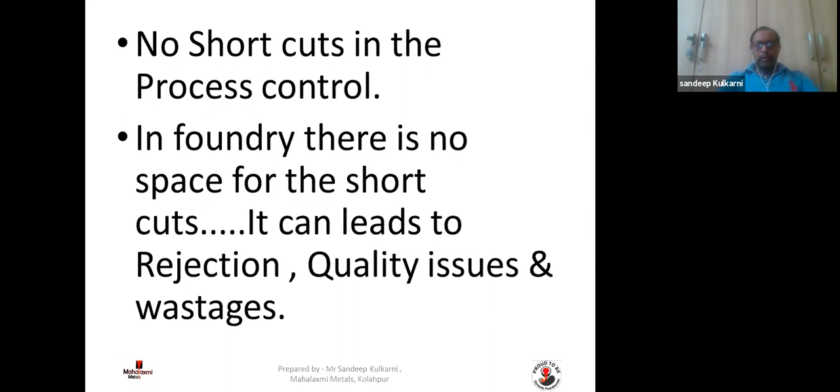No shortcuts in the process control. In Foundry, there is no space for shortcuts. It can lead to rejection, quality issues, and wastage.

We start with supervisor's role before putting pattern on the machine. It is very important that supervisors play an important role even before the pattern is put on the molding machine. The time he spends on the match plate and planning is very important and essential to reduce rejection, quality issues and wastages. First of all, he has to check the planning sheet, that is the PPC sheet, for which pattern is going to be the next planning.

It's very important what he should understand from that is critical to process parameters. The basic important process parameters needed to be controlled for that particular part need to be understood by the supervisor, and he should know which are the focus areas he has to focus on for that particular part. For example, there may be pneumatic ramming, there may be some sort of sleeve, there may be box height, there may be some chill use. So these kind of process parameters will be there which he needs to understand and follow.

He has to verify that the pattern is ready, checked by the pattern shop, and cleared for molding. That has to be ensured. Heat code, logo, and other identification information has to be verified. Down sprue or sleeve requirement has to be verified, along with core availability. Proper dressing of the core has to be ensured.

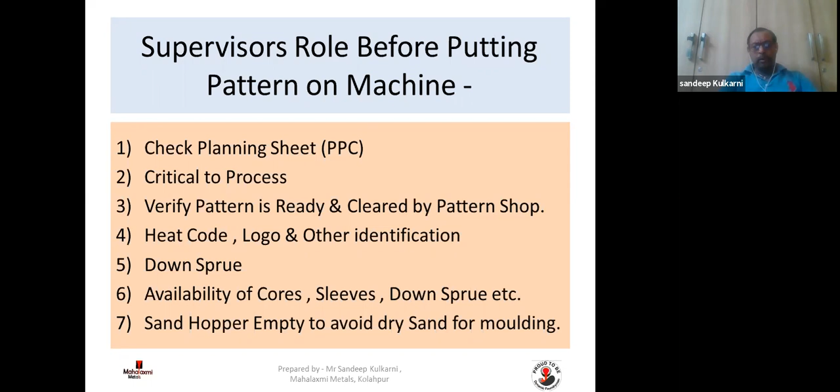We go to supervisory role, important in respect to core inspection. He has to make sure that whatever cores are coming and going to be placed in the mold are properly inspected, properly painted, properly dressed, with proper storage and proper core handling in place.

Then he has to verify mold inspection, that is, first box inspection is important. There he has to see mold hardness, vertical as well as horizontal, has to be checked. It should always be above 85.

Air pressure needs to be controlled and achieved. It should be minimum 6 to 6.5 bar. If it is less, then mold hardness will be less, the ramming will not be enough, and there will be mold swelling, which can cause dimensional issues, shrinkage, increase the weight of the casting, and many other issues due to less air pressure and less mold hardness. So he has to ensure that.

Pneumatic or hand ramming, if required, has to be ensured. Sand properties need to be verified, whether those are in given range, for example GCS, permeability, compactability, and moisture. Sand volume in the box has to be verified. We'll see some slides on that in the later stage of the presentation.

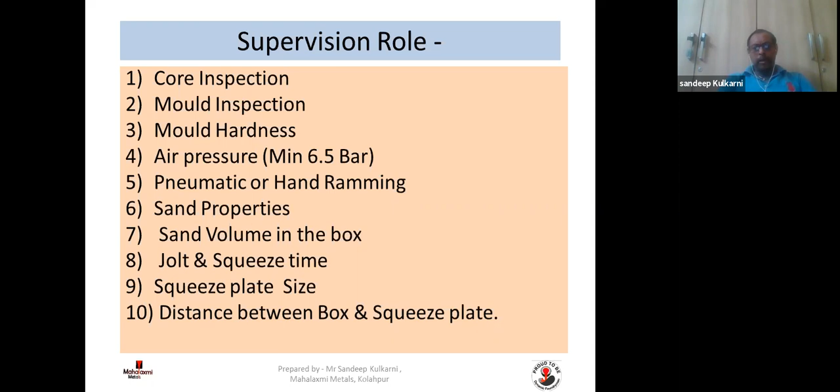Do not use graphite powder or diesel. It is very dangerous because it will hamper your surface finish. We have a specific slide on this also in the later stage of the presentation. You can use mold releasing agent instead of diesel, which will help you get not only mold release but also avoid sand sticking, and will not affect the surface finish of the casting.

Venting as per guideline: the number of vents and vent size need to be specified and verified. He has to ensure that after venting, the loose sand remaining near the vent is removed by putting in air, otherwise that sand can fall into the molding box and cause a sand defect. So not only the number of vents, but vent size and removal of loose sand is very important.

Placement of chill, denseners and chaplet as required. It is very important to see chills are properly painted. This is used after shot blasting and painting. Denseners and chaplets as specified have to be used.

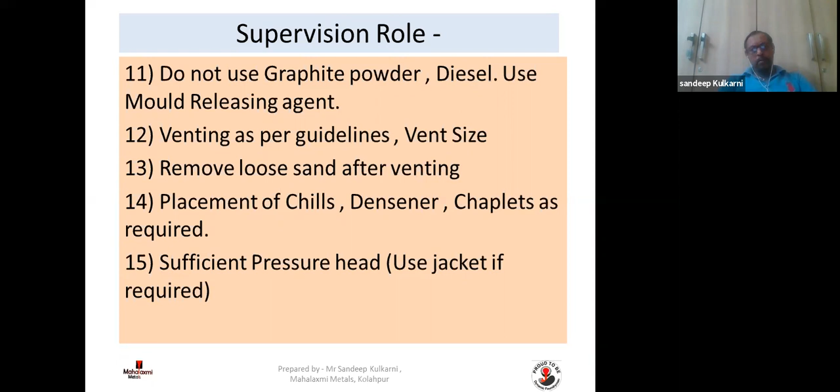Sufficient pressure needs to be maintained here. If sand height is more, more sand height is required, or a jacket is required, or box size needs to be verified for maintaining sufficient pressure for good quality casting.

Post mold inspection, as I told you earlier, is very important. He has to verify mold to mold or box to box contact. He has to verify, after closing of the box, the sand crush. He has to verify if there is any crack available or any mold damage, during first mold inspection. So mold breakage and damage has to be verified.

He has to also verify the pallet and pin bush, so that whatever boxes he is using should have bushes properly available. Many times it happens that one or two boxes don't have one or two bushes, and still that box is running in the molding line, causing issues for casting shifting.

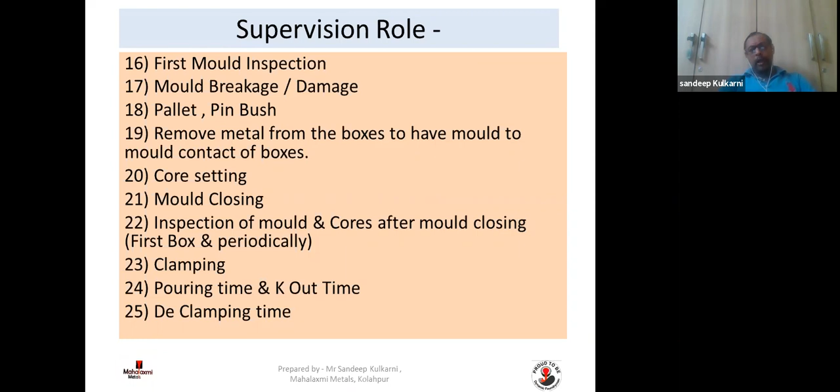Declamping time is also very important because after pouring, you should wait at least 30 minutes before declamping. If you declamp early, there will be box lifting because the metal is not fully solidified, and this will create metal at the parting line or dimension increase across the parting line. So declamping time is also very important.

Collecting spillage from poured boxes is very important. Otherwise, that spillage or metal balls will flow to the sand plant and then to the mixer, and it will damage your mixer. So it is very important to collect spillage after pouring from the box through a magnet.

Return sand temperature is important to understand. Based on that, you have to adjust your moisture, and you can maintain compactability and sand properties accordingly. Sand cooler is important.

Avoid sand cooler bypass, because if sand cooler is bypassed, then not only will sand become hot and take more moisture, causing issues in the casting, but it will also not suck the dust, which is an important function of the sand cooler. If it does not take out the dust particles, your dead clay will increase, and moisture will be more. It will suck more moisture, and all these quality issues will be there. So sand cooler bypass is to be avoided.

Verify and validate sand additives percentage coming out from the hopper into the mixer, because many times we have some PLC reading there. We have adjusted it, say 5 kg bentonite and 1 kg coal dust, but actually 4 kg bentonite will be there, 2 kg coal dust will be getting added. So it will hamper your sand properties. You have to validate whatever is adjusted for sand additives on the PLC against the actual sand additives getting added in the mixer.

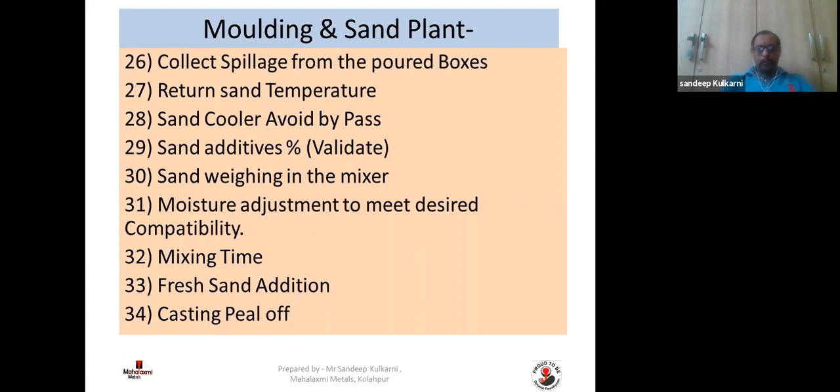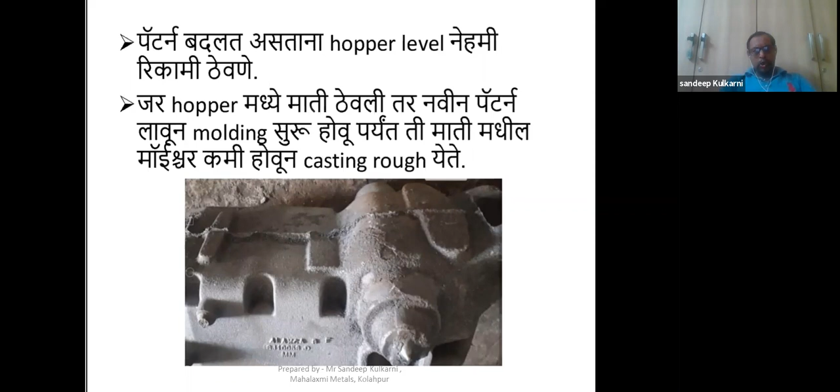Now we go to some of the best molding practices through pictures. This picture is basically for during the change in pattern — you have to verify that the hopper should be empty. If there is some sand inside the hopper, the time taken for change in pattern and start of the new pattern will be a little high, and during that time the sand will get dry. Once molding has started, the moisture will be less and your casting will be rough, mold breakage will be there, and you'll not get good quality casting. So you have to ensure that while changing the pattern, the hopper should always be empty.

Do not use diesel on the pattern — it will give you sand fusion or rough casting. Also, do not use graphite in more quantity or more graphite powder, because that will give you a bad casting surface finish.

One more thing to avoid bad surface finish is do not keep the mold holding for more time.

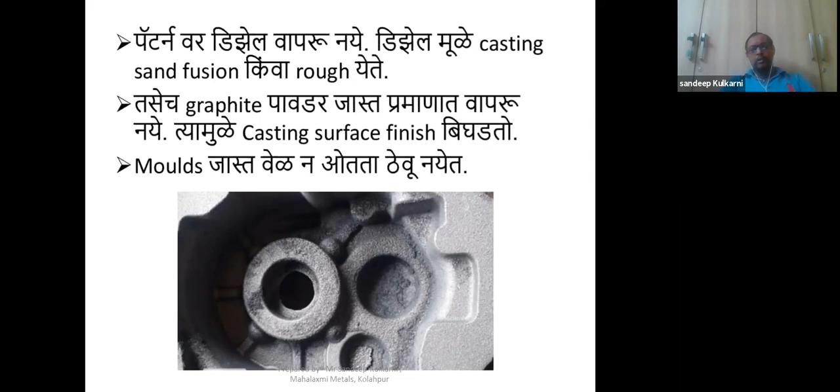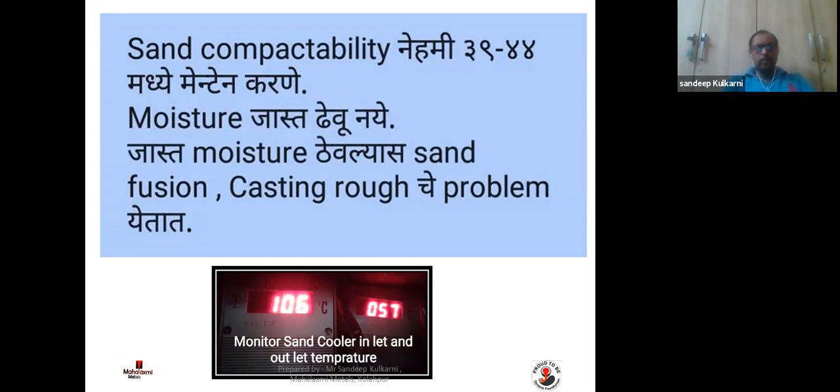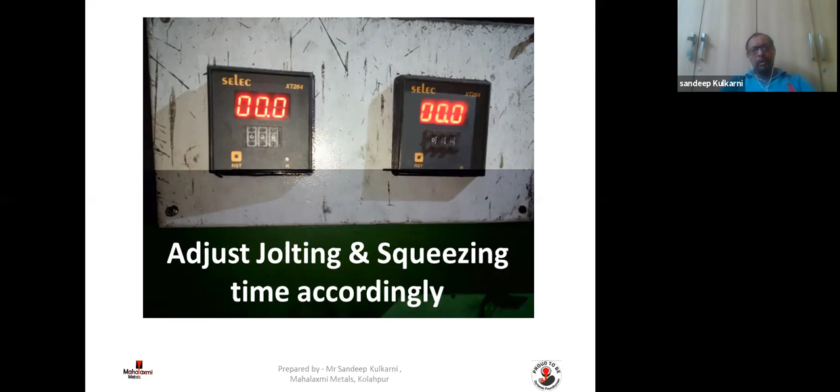You have to adjust jolting time and squeezing time accordingly. This is very important, supervisors need to focus on this area—what is the jolting time and squeezing time given in the control plan, quality plan, or work instruction. He has to maintain it so that you will get enough mold hardness.

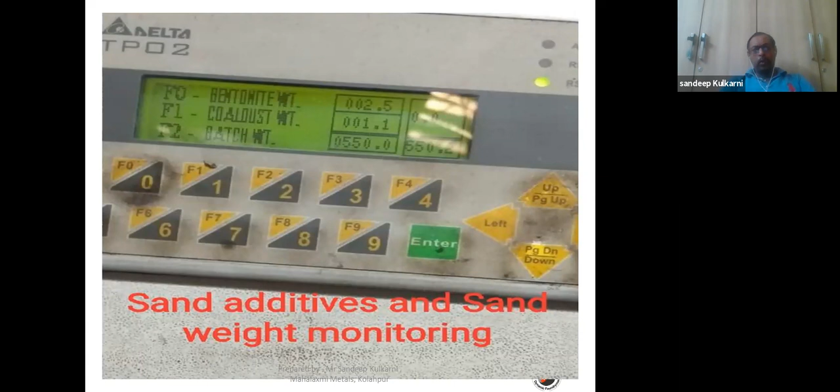As I told you earlier, sand additives and sand weight has to be monitored and ensured. You can see here in the PLC it is showing 2.5, 1.1 and 550 kg. Here I have shown you one example of how to validate.

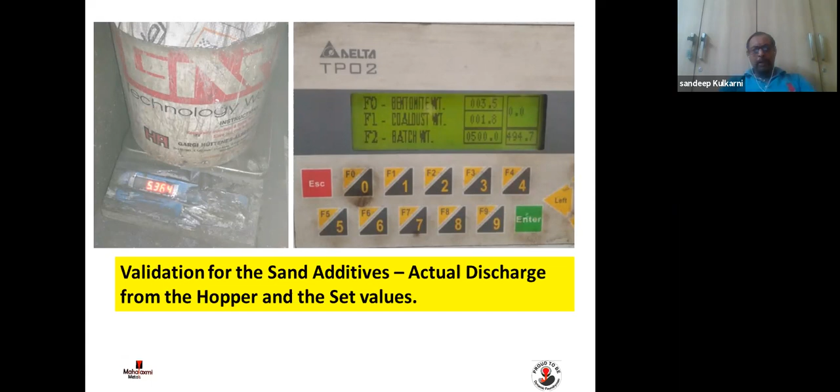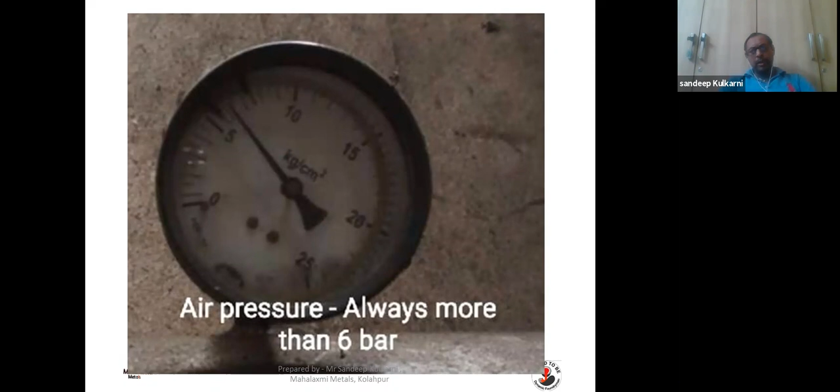Recently we have made one PLC adjustment where we have put a switch on our molding machine where it can off the machine whenever the air pressure drops below 6 bar. It will automatically close down the molding machine, and it will not run afterwards when your pressure drops below 6. So you can do poka-yoke like that, to ensure that at low air pressure molding will not run.

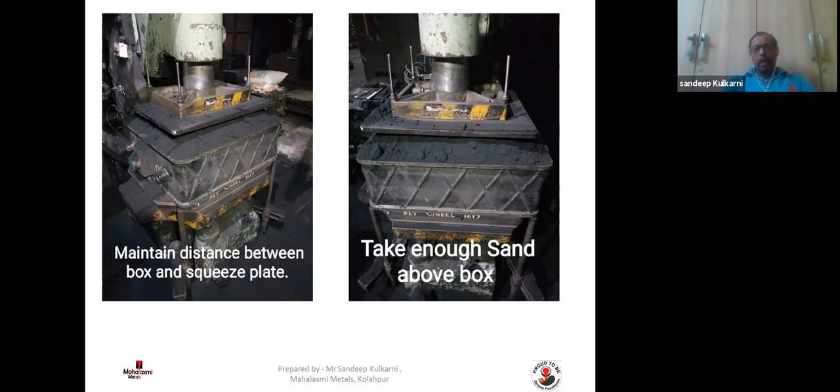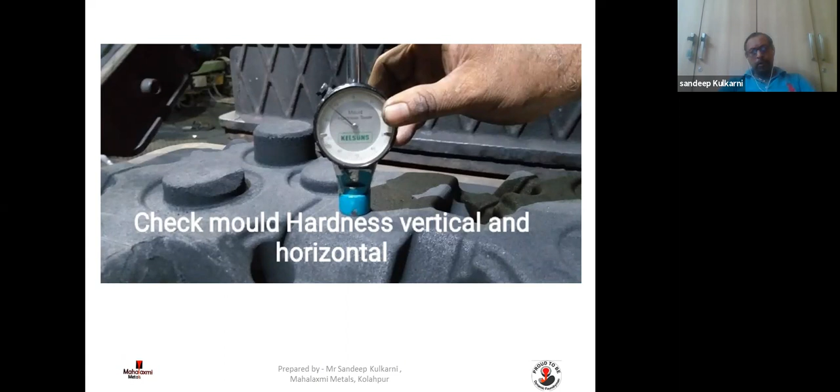These pictures will show you the distance to maintain between box and squeeze plate. Take enough sand above the box so that your squeezing will be better, your mold hardness will be good, and most importantly the squeezing plate will not damage your pattern or rely on the box and damage your pattern. So you have to take enough sand above box to get good mold hardness and avoid damage to the pattern. Check mold hardness vertically and horizontally—horizontally it is very important to maintain that mold hardness.

First, always use shot blasted chills. Do not use wet or oily chills; use fresh shot blasted chills only. Apply chill coat—chill coat needs to be added with thinner in 1:1 ratio. Do not use water to dilute chill coat. It is very important to add only thinner, and the ratio should be 1:1.

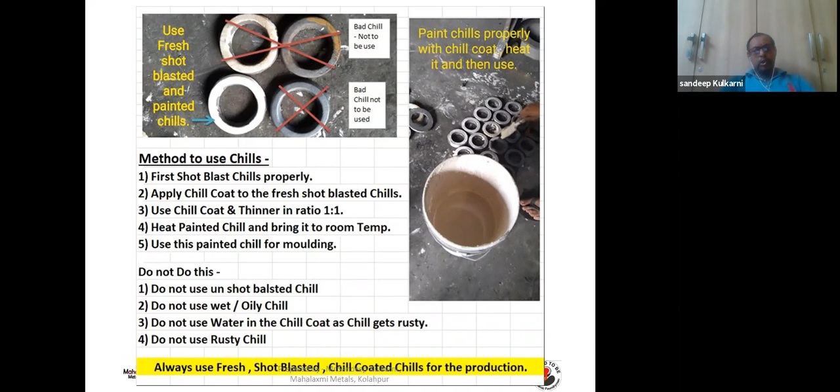Heat painted chills to bring it to room temperature, and use chills at room temperature only. Do not put hot chills in the mold. This is very important. So what not to do is: do not use unshot blasted chills, do not use wet or oily chills, do not use water in chill coat, do not use rusty chills.

These are some important points regarding chill management. Use 100% proper shot blasted chills, similar to the work instruction here. If chills are not used with respect to chill coat and fresh shot blasting, then there are chances that you should get blowholes like this. So you have to ensure that chills are used in a shot blasted condition and after chill coating.

One more thing, do not use worn out chills. You have to ensure the life of your chills. For that, you can put some number or month code on the chill to understand and get the traceability of your chills, when the chills are produced and how many days I am using it.

After a certain time—say 3 months, 6 months, or 1 month, depending on the number of times the chill is going to be used—you can destroy this chill and introduce new chills. So it is very important to avoid use of worn out chills. As shown in the picture below, worn out chills will give you blowholes and increase your shrinkage tendency. So replace chills as and when required.

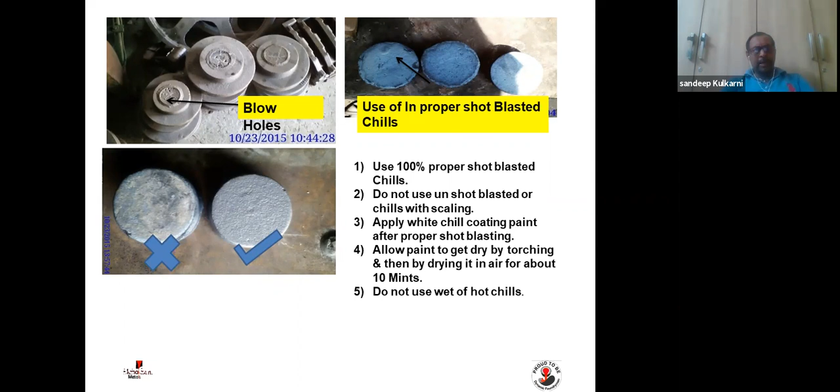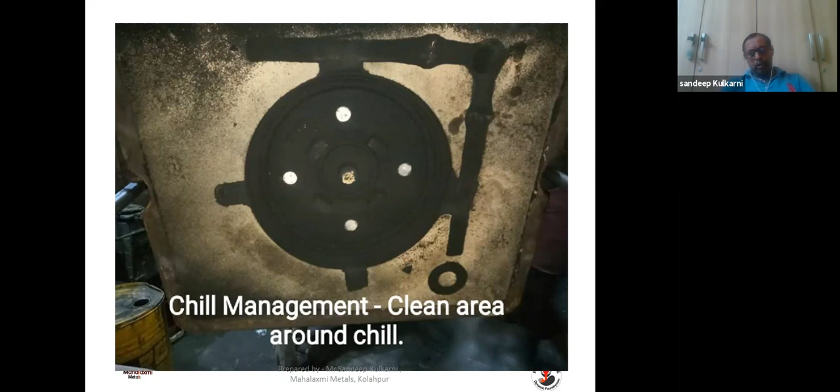For that, you have to maintain some kind of traceability. In chill management it is also important that after putting a chill in the mold, you have to clean the area around the chill, because there will be some loose sand around the chill. You have to blow some air to get that loose sand away, so it is very important that the area around the chill is cleaned properly before you close the mold. This is another picture showing that sometimes we are using some densener or chaplets.

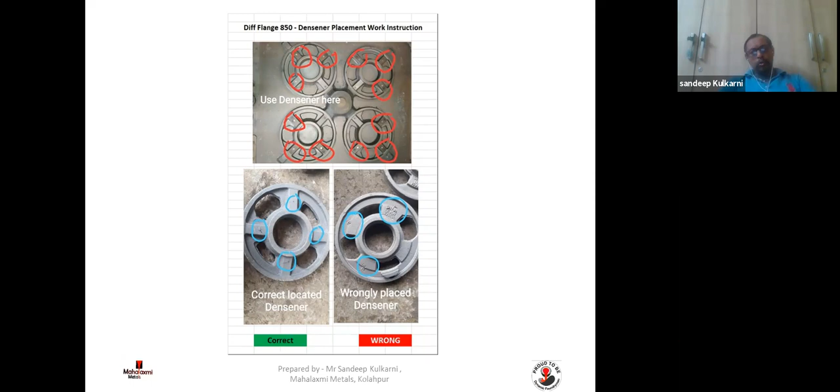The location has to be properly maintained and properly marked on the pattern itself, so that people will not get confused about the location. You can put some letter or marking where they can place the chaplet or chiller, so there should not be any confusion. I've shown here one example of how it can be misplaced, and it will not give you the desired result. It will give erratic results, and the purpose of using those chaplets or chillers will not be served.

Use a pneumatic rammer for proper ramming where required, which is very important. Do not close broken molds. It is like a crime to close the mold with broken cavities, so do not do that.

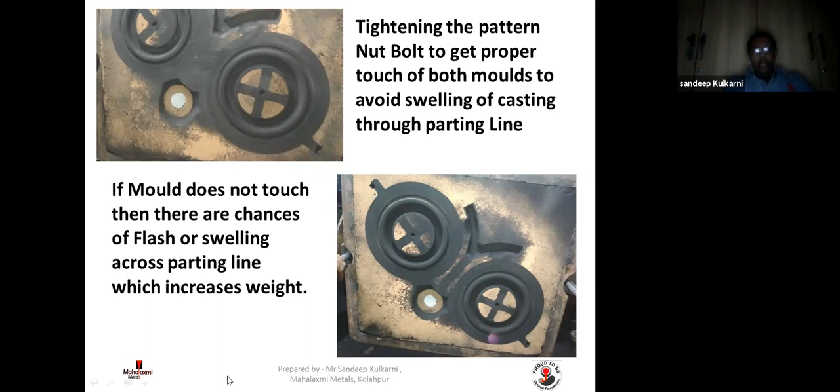Ensure when you are closing the mold, first inspect and ensure that all areas of the mold are properly covered and touch each other. If it is not touching at a particular area, there will be a gap, and metal or flash will form, giving you dimensional inaccuracy. It will also hamper the weight, and give you swelling, causing issues during machining. So it is very important to see that the molds touch each other, and there should not be any flash or swelling across the parting line.

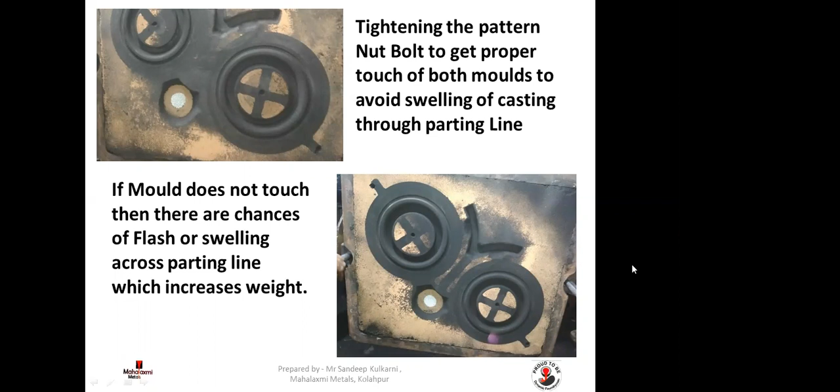Next is mold closing. You have to ensure that mold closing is parallel on both ends, going down evenly. There should not be one end going down differently from another, because if it is not parallel, there are chances that the mold will get crushed and there will be sand intrusion and extra metal as well.

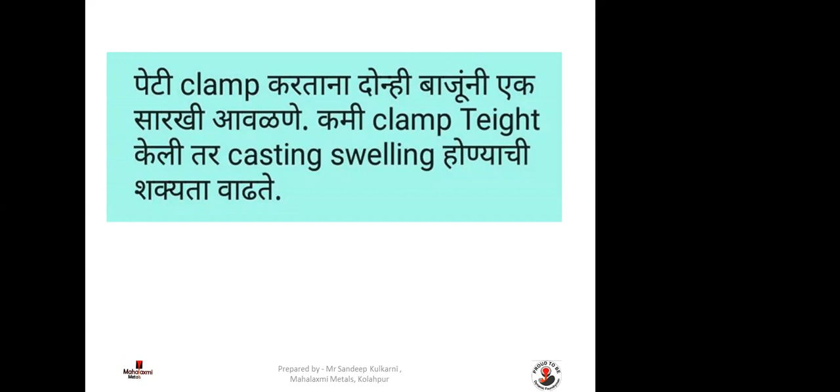All parts having a core need to have proper gassing. Venting is always there, but you have to ignite the gas as well, because if you don't ignite the gas, there are chances that gas will remain inside the mold cavity, and there may be chances of blowholes. So try to ensure proper ignition of the gas as well.

Non-removal of filters will give you insufficient feeding, because that filter will block the feeding efficiency of the sleeve. So it is very important to take out the filters immediately after pouring, so the full efficiency of the sleeve can be achieved.

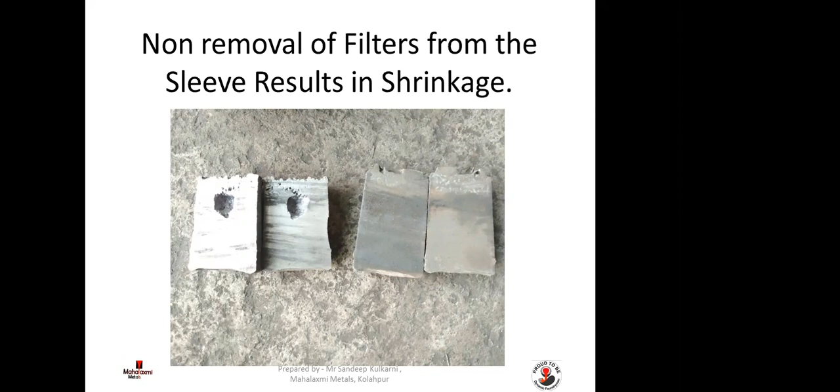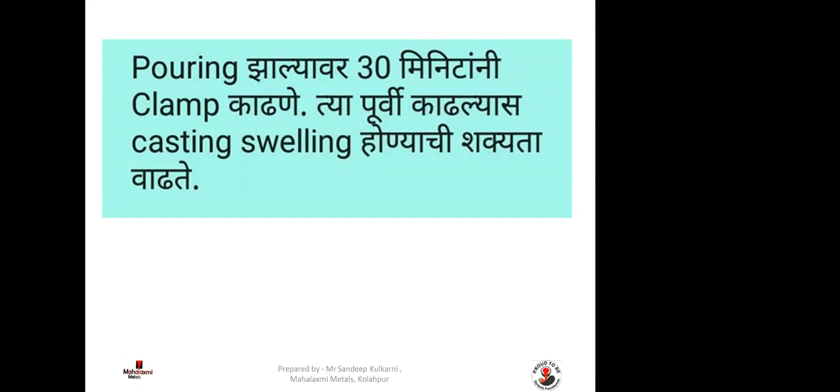After pouring, around 30 minutes, the clamp has to be removed or declamped. This is very important. If it is removed early, there are chances that casting swelling will occur, resulting in more height of the casting or dimensional inaccuracy across the parting line.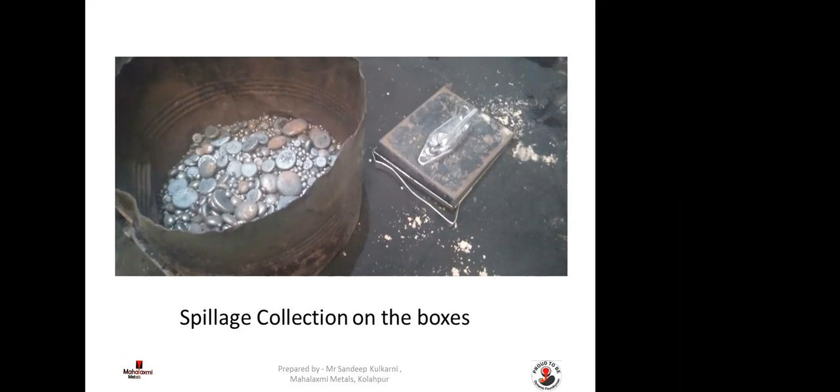Spillage collection on the boxes needs to be monitored, and it has to be done so that those splashes or balls of metal will not flow along with the sand into the mixer or bucket elevator, which will damage your entire system. So it is very important to collect that spillage.

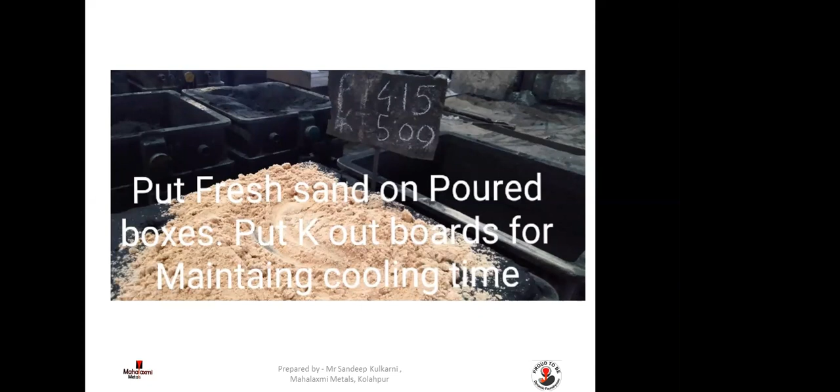Put fresh sand on the poured boxes. Put knockout boards as well to ensure knockout time is monitored and maintained. Fresh sand will help you in reducing your dead clay, and also help in maintaining your sand distribution. It will also help in reducing your sand temperature, so it is very important.

It has been said that if fresh sand is not added on the box, you can instruct your shakeout operator to stop the shakeout, so that boxes will not go ahead without fresh sand. This way control will be maintained, and some pressure will be put on the operators to put fresh sand. Only after putting fresh sand can you remove that brake, and knockout can be started again.

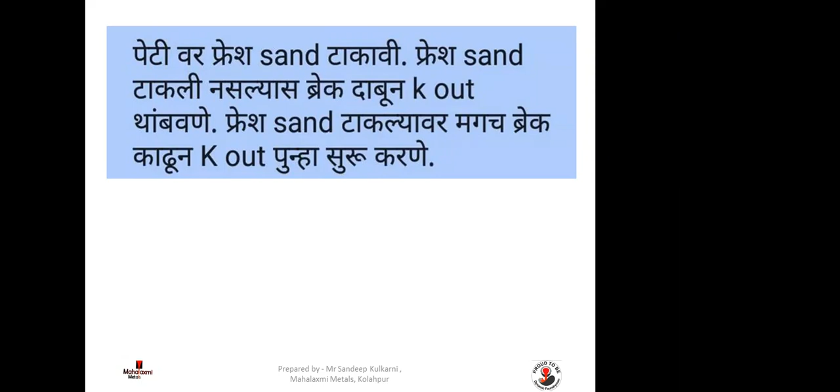Similarly, it is very important to follow all the instructions given - the process parameters, work instructions, quality plan, or control plan are to be maintained. Process control parameters are very important, and they will help you in reducing rejection and give consistent quality. So do not take any shortcuts in process control.

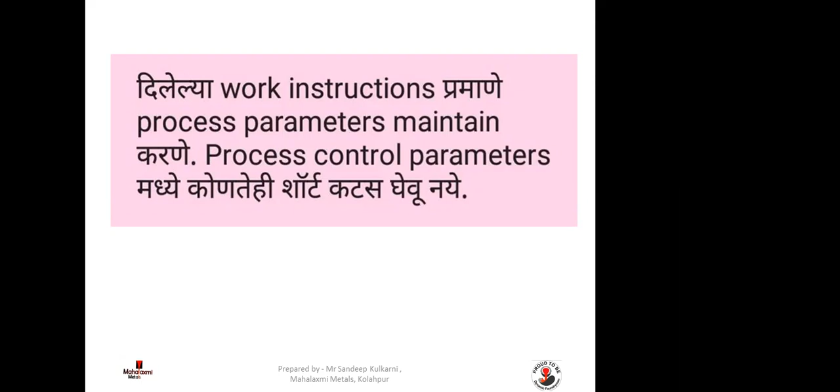It's important that the pin has to be removed before boxes come for shakeout. If the pin is not removed and the box comes at shakeout, there are chances that the box will get stuck in the shakeout and it will hamper your production. It will cause a breakdown.

So it is very important to stop the shakeout. If the pin is not removed, ask them to remove the pin and then take that box for shakeout. The shakeout person should be aware of the importance of removing the pin as well as putting up fresh sand. If both things are not done, he should stop the shakeout by putting a brake, and only once it is implemented can he allow those boxes to go for shakeout.

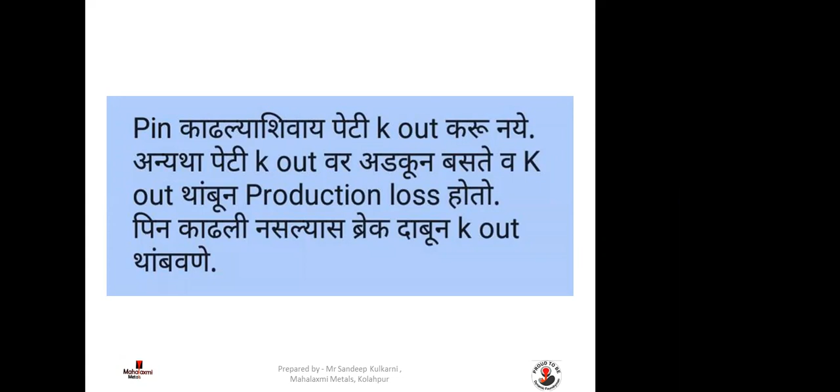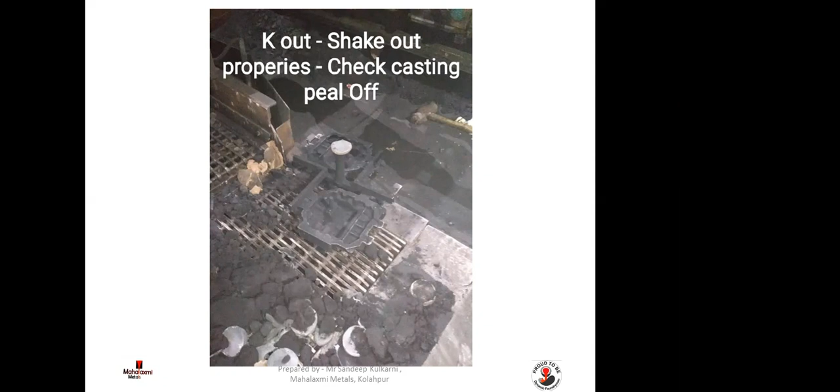Then you have to verify your casting peel-offs, or sand peel-off on the casting, and verify that it is within limit and tolerance. If the peel-off of sand or casting is not good, there are chances that rough surface finish will result, more shot blasting will be required, more finishing work at the fettling shop, and it means your sand properties are not as required - because if peel off is there, there should be something wrong with your LOI/VM. So you have to work on the sand properties, and this will help you in improving them.

While doing shakeout, check that all the sand inside the casting cavity is totally removed. Many times the sand from inner cavities or deep drawn cavities is not removed, and because of that your hopper level keeps going down, and you face low volume sand issues in the system, which will hamper your sand quality, sand properties, and casting quality at the end. So it is very important to ensure the sand is removed from deep down cavities at shakeout.

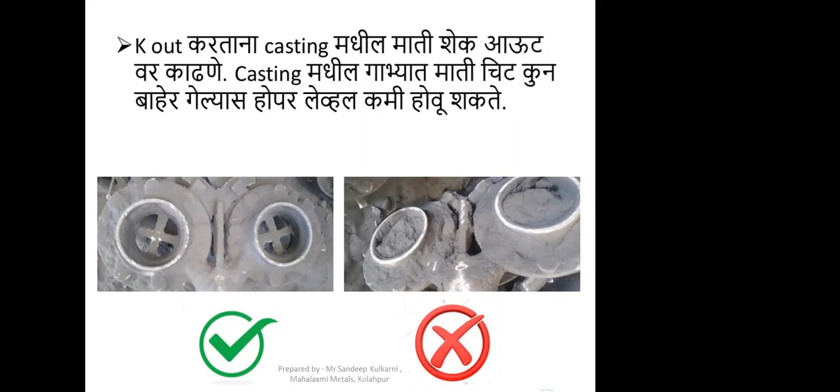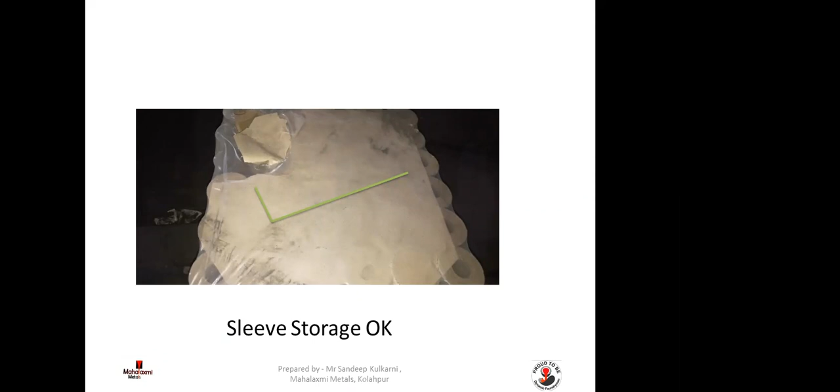So check sand sticking, as I told you earlier also. Sleeve storage is very important. If you take some sleeves for production, ensure that all the sleeves are finished. If some sleeves remain unused, ensure they are kept properly with proper wrapping of plastic paper or bubble paper. Do not keep sleeves in the open air.

It will get inefficient in feeding. It's just like biscuits - if we open the packet of biscuits and keep it in open air for some time, you will find that it becomes soft and does not remain hard. Similarly, your sleeve efficiency will go down if you keep those sleeves in open air. So try to keep sleeves in proper packing.

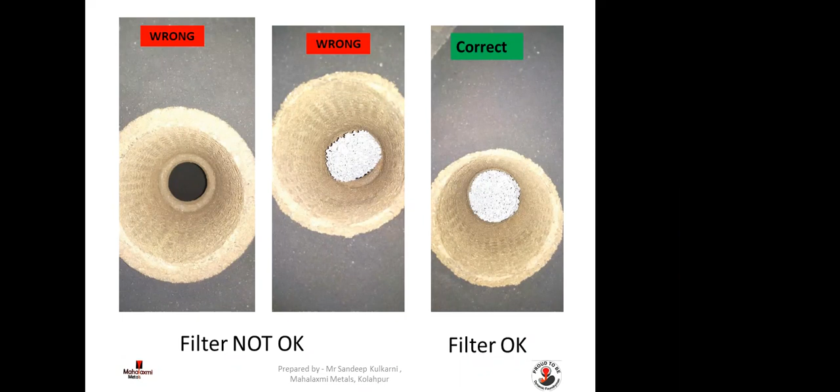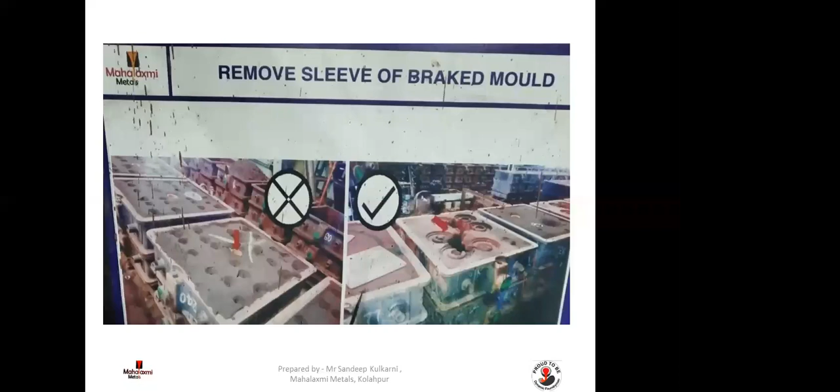Removing sleeves from broken molds is very important. That sleeve has a huge cost, and if you break say 5 boxes, 5 sleeves will be wasted if not taken out at the right time. So after mold breakage, you have to ensure all sleeves have been taken out from the mold and reused for the next box, so that wastage and damage will be avoided.

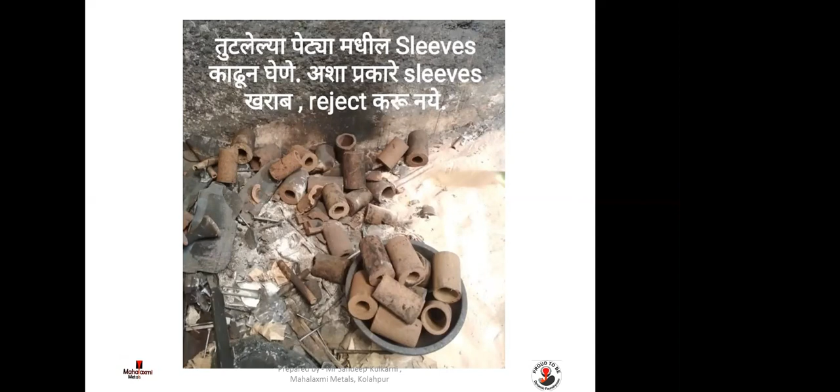This kind of scenario has to be avoided. A lot of sleeves are wasted here, a lot of sleeves have been broken here. It's a total loss to the company and the organization. So try to avoid these kinds of things.